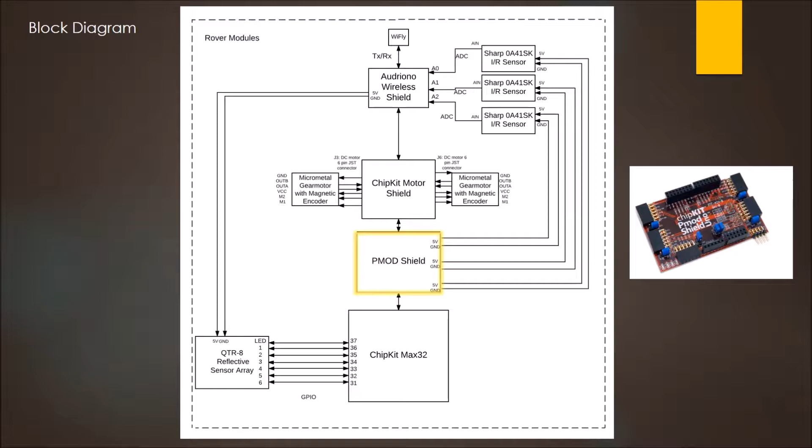Our block diagram shows the hardware design for each rover. At the base of our rover is the ChipKit Max32 microcontroller board running FreeRTOS, a cross-platform real-time operating system. On top of the microcontroller lies the ChipKit PMOD shield, an input-output expansion board that provides additional connectors for peripheral modules. On top of the PMOD shield is the ChipKit motor shield, another expansion board that provides additional circuitry to drive various types of motors.

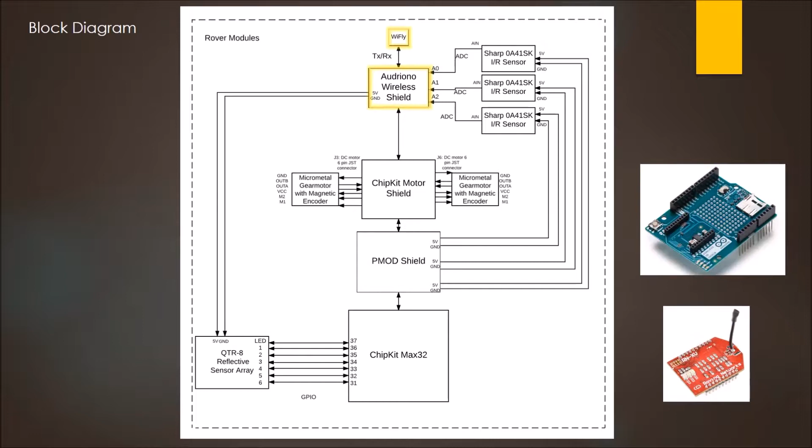On top of the motor shield lies an Arduino wireless shield with an attached WiFly, providing the rover with wireless communications to a server. Additionally, each rover has 4 sensors, 3 infrared proximity sensors, and 1 QTR8 reflective sensor array. The infrared proximity sensors made by Sharp have analog outputs that vary from 3.1 volts at 4 centimeters to 0.3 volts at 30 centimeters. These sensors are powered through the connectors on the PMOD shield and output their values to the analog pins on the Arduino wireless shield.

The QTR8 reflective sensor array is used as a line follower. The sensor outputs 6 digital I/O compatible signals that are read as a timed high pulse. The sensor is powered through 5-volt and ground connectors on the Arduino wireless shield and uses 7 general purpose input-output pins on the microcontroller.

The microcontroller and extension boards sit on top of a battery pack attached to our rover. Plastic mounting boards surround the rover in a box formation. The infrared sensors are mounted to the front, left, and right of the rover to detect walls and open paths in the maze. The line follower is mounted to the front of the rover, facing the floor to detect path and intersection markings below the rover.

The USART thread constructs the data received from the sensor thread as a packet for an interrupt-driven transmission to a server hosted on a Raspberry Pi through a WiFly. The server will respond with a motor command based on the sensor data it receives. A USART interrupt will occur when a command is received and will send that command to the motor thread through a third FreeRTOS message queue.

The motor thread carries out the command received from the message queue by driving the motors using pulse width modulation and reads encoder data using the external interrupt. The sensor thread also has the ability to send motor commands to the motor thread through a FreeRTOS message queue to adjust the motors based on the line sensor's values.

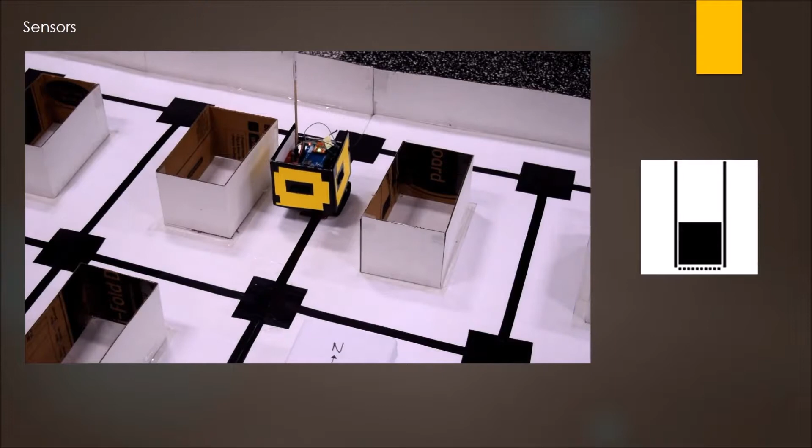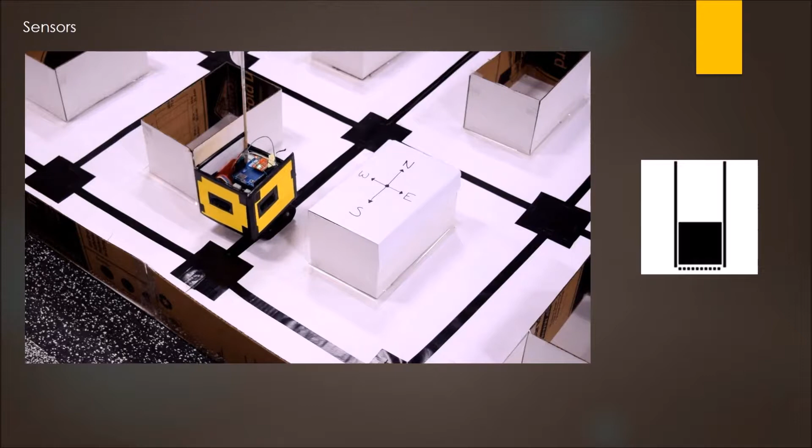The sensor thread uses data from all 4 sensors to determine the state of the environment surrounding the rover. The 3 infrared sensors can detect objects 4 to 30 centimeters away. These sensors are used to find the walls and open paths within the maze. The line follower sensor determines if the rover is on a path or at an intersection.

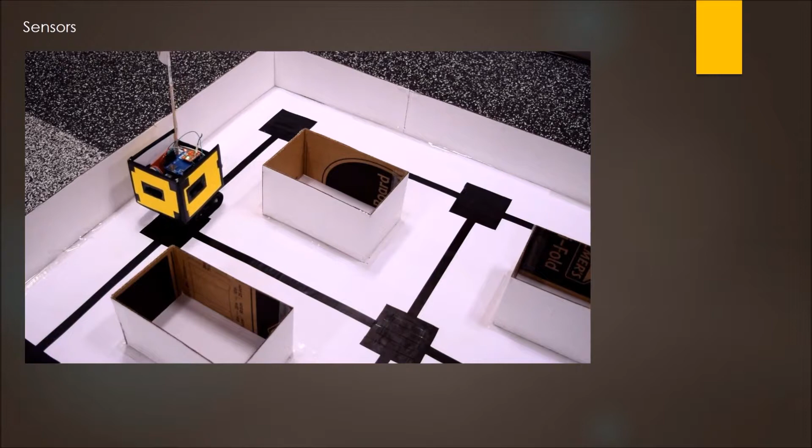If the line follower sensor is on a path and the infrared sensors detect objects to the left and to the right, the rover is currently traversing through a corridor of the maze. If the line follower detects an intersection, the infrared sensors are used to determine which directions are blocked and which directions are open. The rover can encounter 6 types of intersections.

When the rover approaches an intersection, the type of intersection is sent to the server, which responds with an appropriate motor command. When the rover is on a path, the line follower can determine if the rover is veering to the left or to the right of the path. If the rover is moving forward, the sensor thread can send a motor command to adjust back on path.

Our rovers include 2 micro metal gear motors that are attached to the Zumo rover chassis, one for each track. It also includes two magnetic encoders which are attached to the inside half of the motors. The magnetic encoders send back values that can be converted into distance the rover has traveled. It also takes in motor commands from the motor shield that's mounted on top of the chipKIT to execute on the motors.

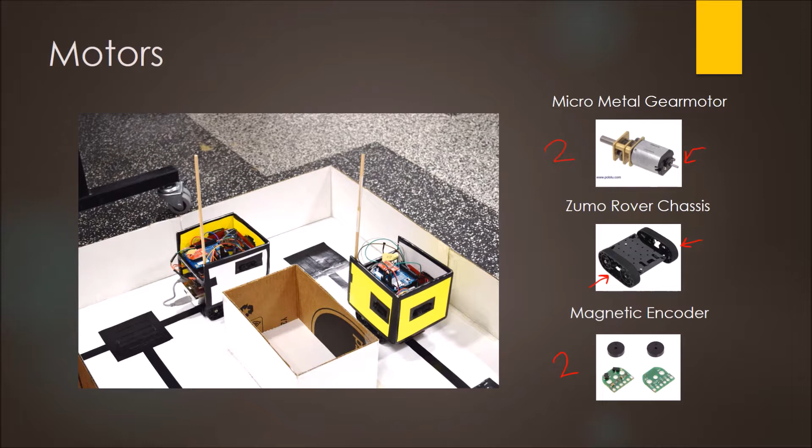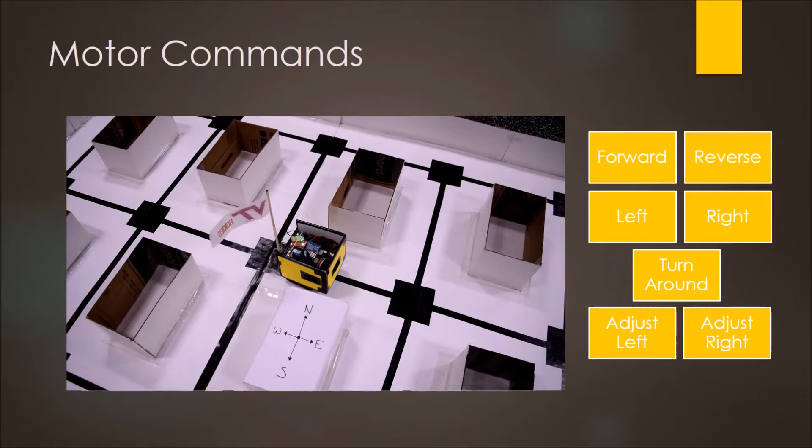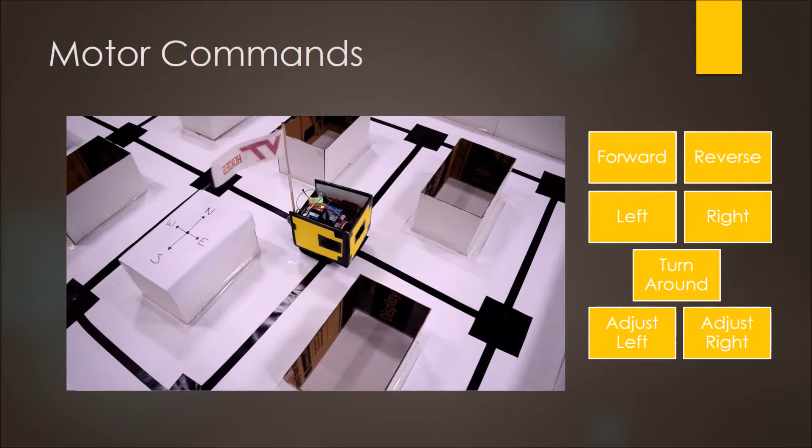Basic motor commands include the following. The rover is able to go forward, turn left 90 degrees, turn right 90 degrees, turn around 180 degrees, and also go in reverse. The rover is also able to make adjustments left and adjustments right so that it stays centered on the line. This is done using pulse width modulation. Pulse width modulation allows us to operate the motors at varying speeds. This allows us to set the motor to either go faster or slower.

Here you can see that with a larger duty cycle, the motor is on for a longer period of time than it is off. This means that the motor will move at a faster speed. With a smaller duty cycle, the motor is on for a shorter period of time and off for a longer period of time. This means the motor will operate at a slower speed.

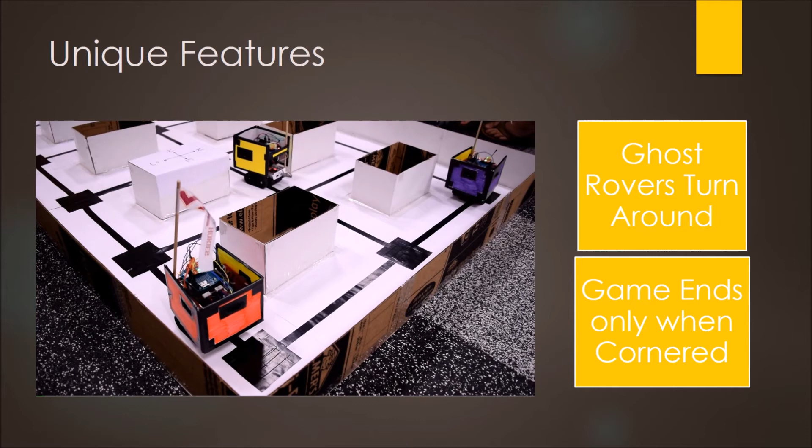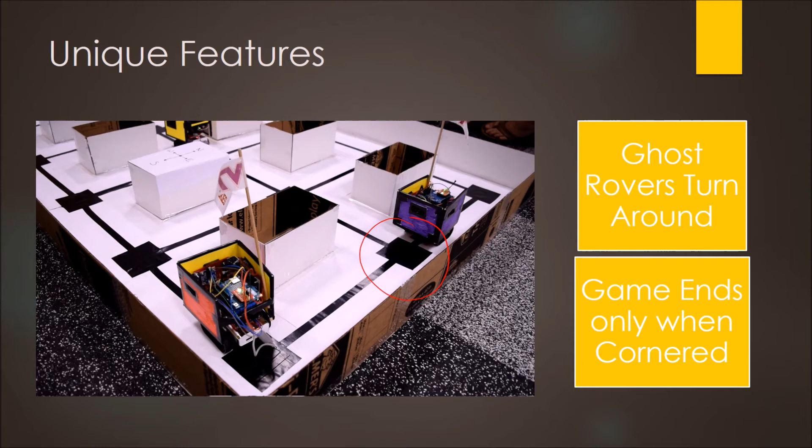While developing the gameplay algorithm, there were certain unique features that we needed to add so that the game would run smoothly. One of them was that we had to give the Ghost rovers the capability to turn around so that they wouldn't collide into each other. As you can see in the video, they were headed to the same coordinate, and since they would only be able to go towards the middle intersection, this Ghost rover had to make a U-turn so he would go back the way he came from.

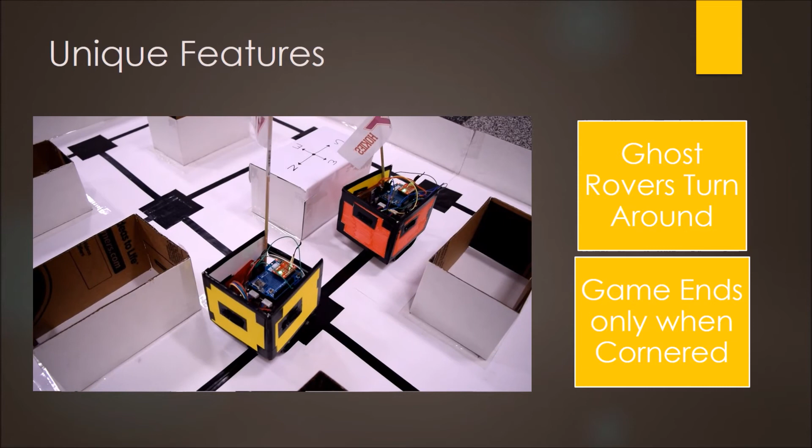Another unique feature that we added for the game was that Pacman was allowed to run away from the ghosts, even if they're headed to the same coordinate, as long as they're in the same heading. So here you can see that they're both headed to this coordinate, but Pacman is running away from the ghost, so it allows him to continue going without the game coming to an end.

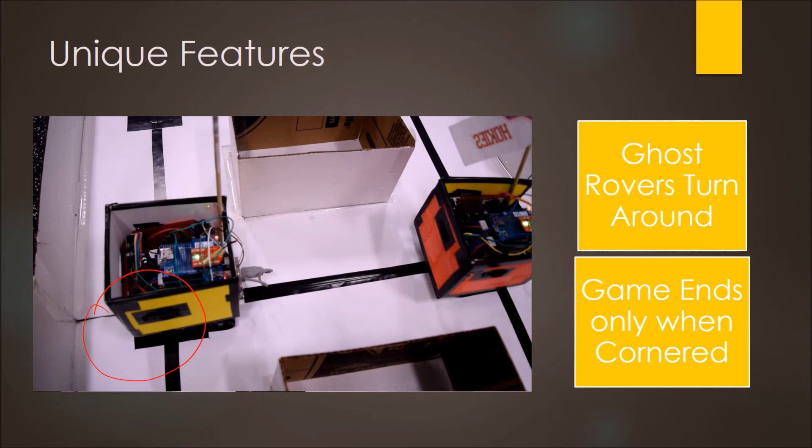After extensive testing, it is known that the game will run as long as Pacman has not yet been cornered. Since there's still a factor of randomness to the game, the highest record that we have gotten so far is 17. Manual override mode will also fix the occasional issue when a rover goes off path, allowing this game to run smoothly as long as it can.

Reliability throughout the semester was a tad bit of a struggle for us, only in terms of physical hardware sensors and the motors. This is mostly due to the fact that we were handling the rovers for long periods of time during testing, picking them up and putting them back down on the maze. This caused a lot of stress on the components and could have been the fault of the human as well.

A possible area of improvement for our project would be to make the game board bigger. This would allow the game to run longer, and it would be more interesting as the rovers would now be able to take more options when they come to an intersection. Another thing is implementing manual control mode earlier. This would just help us with testing the code and testing the gameplay algorithm when it all came to an end near the end of the semester.

Another thing is implementing robust motor controls. This would have helped us during our earlier stage when we were initially testing with lackluster motor commands where the adjustments weren't based off of pulse width modulation. This caused the rover to make zigzag turns and would always throw it off every time it got to an intersection.